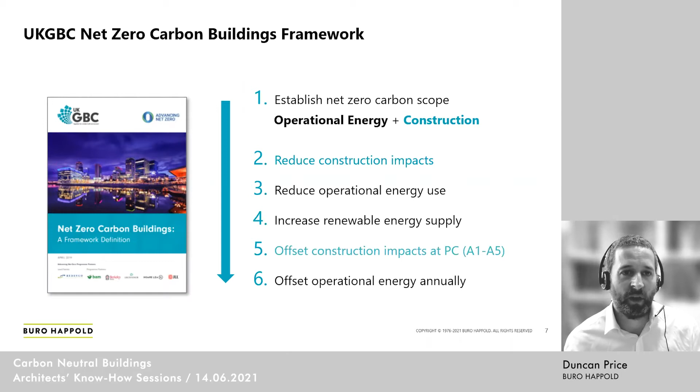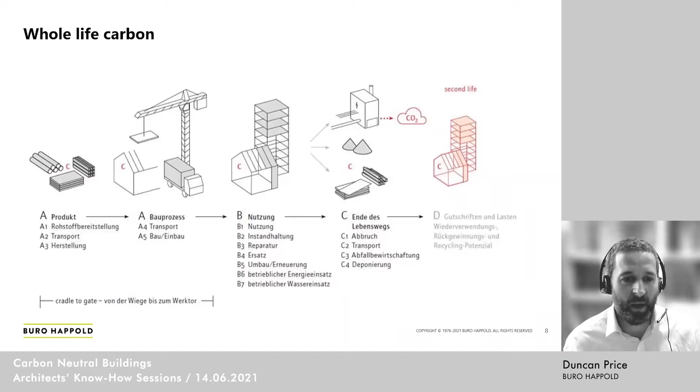One of the key things to understand as well is this term whole life carbon. So it's not just thinking about design, it's thinking about the product production, it's about the building process, it's also about the operation, and also about the end of use of the building. Going back to Emanuela's question about circularity, it's also about how do you take apart a building? How can you reuse the components? How can we ensure that most building products have a second life? Almost thinking of buildings as material banks, with a set of components that you can take apart and reuse again in another place or another building.

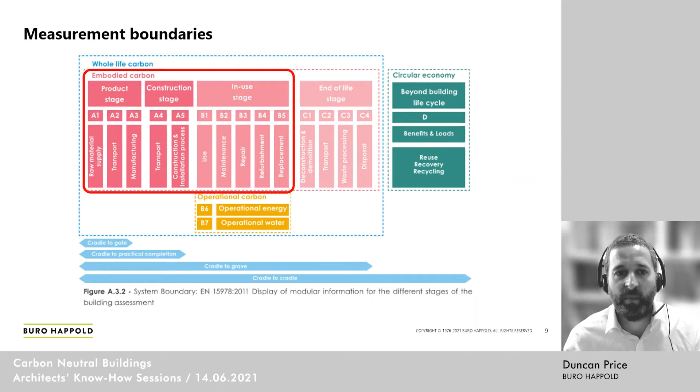This diagram tries to show the fact that this is a very fast moving agenda, and I'm sure you all recognize that even in your own countries, there's a proliferation of lots of different standards out there. Taking a UK example, we have city policies from the Greater London Authority, which is probably the most advanced city in this space in the UK, but many other cities are now moving fast as well. We have reporting through environmental impact assessments. There are targets from UK Green Building Council, the London Energy Transformation Initiative, LETI, the professional institutions like the Royal Institute of British Architects, and also the certification schemes like BREEAM and LEED.

And they all measure slightly different things. So that's not helpful, we understand that, but it's very important that you're very clear about what it is you're looking at, what's most important for your project. And we're slowly but surely getting alignment now. So clients are asking for the same thing in the same format, and the industry's learning together.

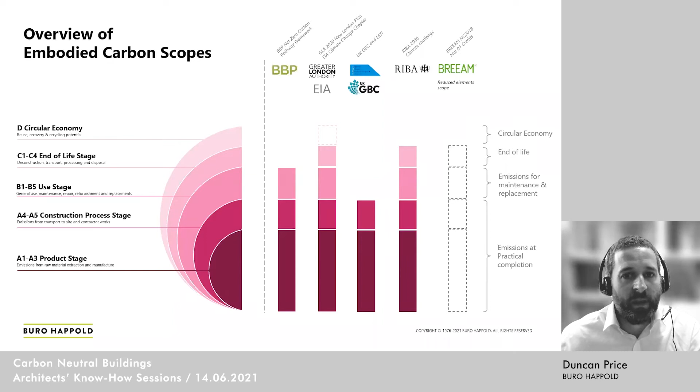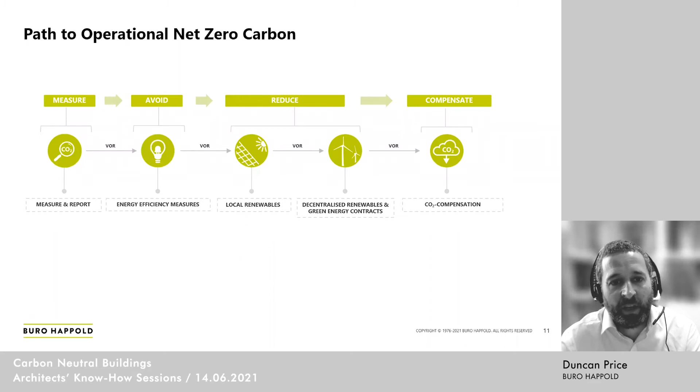So for operation, we can conceive how we get to net zero. It's about measuring, it's about having high levels of energy efficiency, local renewable energy, and enabling your building to be powered by clean green energy, often clean electricity, but could be hydrogen systems or low carbon heat, zero carbon heat from heat networks. And then having very clear carbon accounting and carbon offsetting for residual carbon. As I say, for embodied carbon, it's a little bit harder. So Thomas is going to talk through a little bit around the targets now, and I'll hand over to Thomas, and then I'll drop in again at the end.

Yeah, perfect. Thanks so much.

So there are many frameworks out there, and also all the architecture boards around do understand that they need to act on it. So there is one from RIBA that we find quite helpful in our international projects, the challenge on domestic and non-domestic buildings and how over time those can be brought into play. So also one of the questions that came in was really how do we get there, what are benchmarks?

So that helps us quite a lot on looking at benchmarks where we want to go, and also seeing that it increases in a 5-year period. Next one, please. On that one, it's kind of important. I tried to see the question, how can you realistically offset it? So offsetting is one of the topics that was on Duncan's slide, and maybe we take it for later on.

So one big question is where the embodied carbon is, and there you can see that much is in construction already, 35, sometimes it says 40%. And then we do have it in maintenance and refurbishment. So there is really something in there for everyone to act on, with operations, regulated and unregulated as well. So that leads to the next part, where can we act on it.

So from the construction part, what we're mainly talking about right now, it's mostly in superstructure, facades, MEP, substructure, fit out, but also the transport and construction. In reality, you need to tackle all of them. It's not really helping to only tackle one, because the impact won't be significant. So you probably have to go on all sides, and we're going to show you a few projects where we did that.

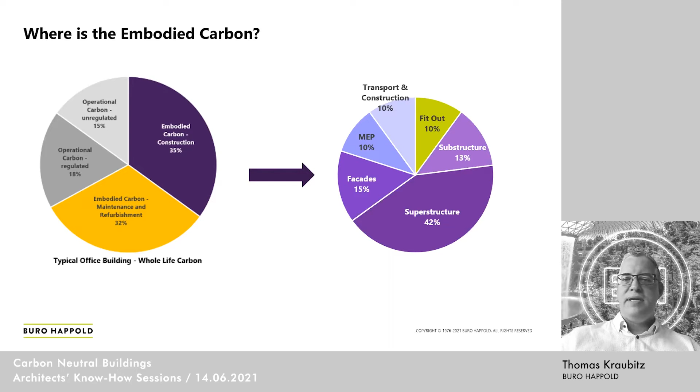Next one. So that also means looking at it over the whole period of the design life, but also from the beginning. So first of all, the question you always need to ask is whether a building can be reused, whether you can bring in changes that make it possible to keep it for the next generations, or whether it has to be new build. So that's a question we bring in quite often to our projects.

The second one is that you need to challenge the brief, especially as an architect. You need to ask really, why do you want to achieve certain topics, and is it already ambitious enough? And that's one of the biggest questions we get on projects. Are our ambitions right? Could we do more, or should we do more? And the third one is really bringing in low embodied carbon in your materials. Often enough, and we're going to see that as an example, it's a mix of materials, so it's not only one material on 100% of the building, but a mix.

That's normally when we come in, and it's very important as an architect to bring in efficiency in design, to design what's really needed, and to see which aspects are to be considered most. And then last but not least, design for deconstruction. That's a tough one, especially for the architecture, to say, well, we build it in a way that in 1, 2, or 10 generations it has to be taken apart, and how do we best do that?

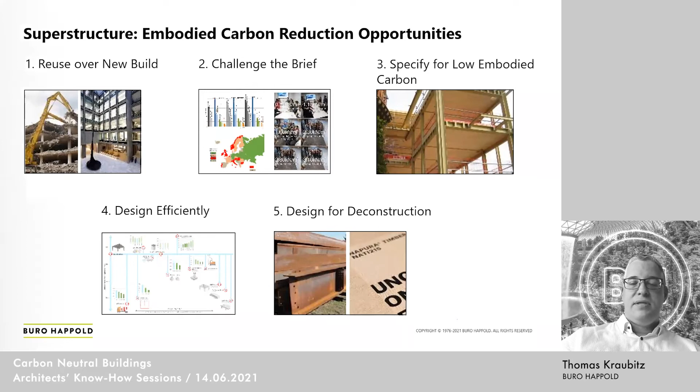Next one. And so those are the questions that are coming up then. What does good look like? What is a benchmark project? And how would you actually define it? And one best in class is currently on site, and just last week we had the roof getting on top of the building. It's a hybrid building, so we have timber structure in there, we have concrete in there, we have a lot of smartness in it.

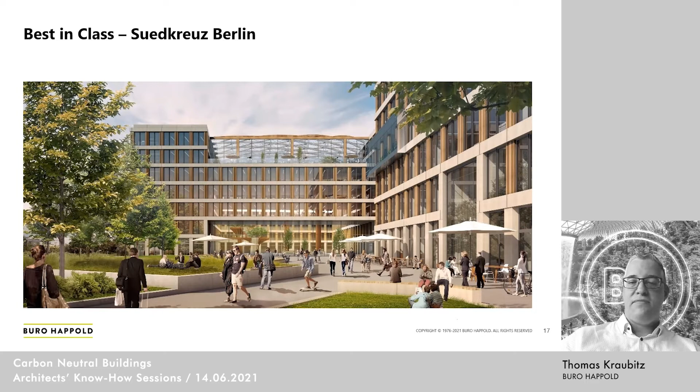It's also aiming for certification. It goes for DGNB Platinum, it goes for WELL Gold, and quite a lot of effort. It's a very interesting site. It's a pre-used site, and it does have a lot of components. If we go to the next one, from the rendering, really bringing it alive, one of the key parts is open space, bringing light in there, and we have those trees in there that serve as meeting facilities.

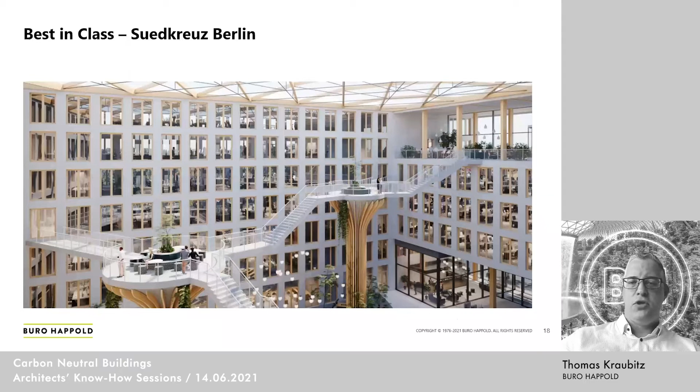And you can see already here that we have a mix of materials. So it's a hybrid. Obviously there's quite some concrete in there, especially below ground structures. But also here you can see that the trees and the bridges require certain materials, but it's mostly concrete. And then we have a lot of timber, as you can see from the frames, but also from the roof structure with ETFE. So there is really a mixture of materials, using the right material for the right purpose.

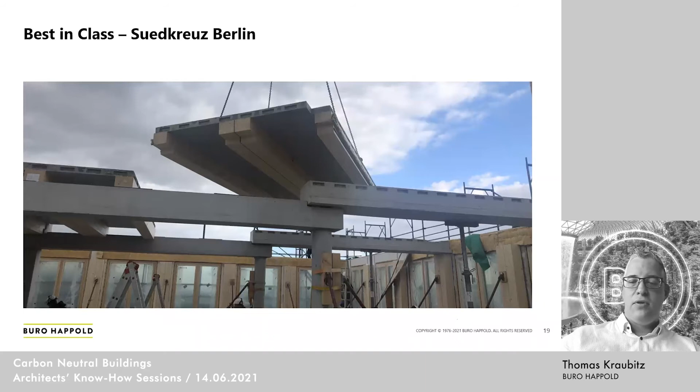And here we see it in construction already, bringing in modular elements, prefab and precast. That's one of the key parts in how those things can become successful. And the next one already shows you a bit of the underside of an office floor. So very interesting to bring that in. There's a full BIM model behind it, and that has been carried from the early design to construction.

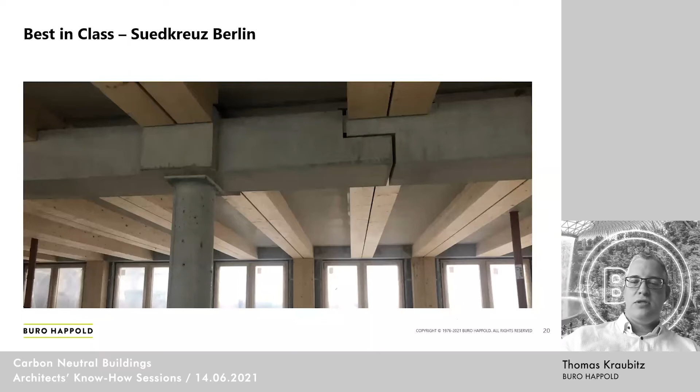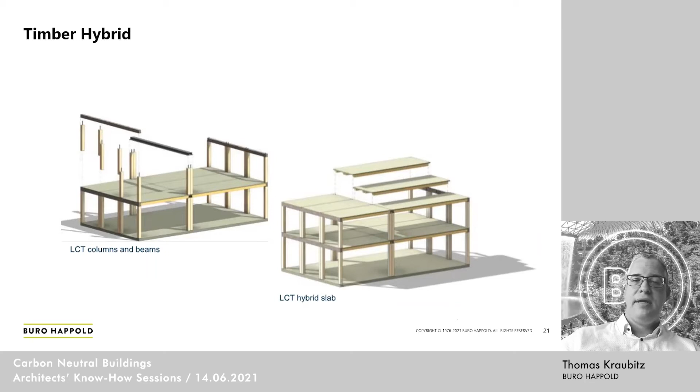Here it's also just everything that was taking place on site has been tested before. Everything has been planned in a modular way, and so that makes the whole construction process quite fast and very good to calculate the effect.

I'm going to show another example now, which is another project which is on site at the moment, which is the Stratford Waterfront development in London on the Olympic Park. And this image is from probably the biggest building on the site, which is the London College of Fashion, which is relocating from about 3 or 4 different buildings across London, all onto one site for the first time.

So it's part of the University of the Arts London, and it's part of a culture and education district alongside the Victoria and Albert Museum, V&A East, plus the BBC Music Studios, Sadler's Wells Theatre, and also some residential schemes as well. And I just want to show this example because it's a very high quality design.

So Allies and Morrison, the designers for this LCF building, there's no compromise on quality, and yet it's been designed very carefully with both passive design and active design to be very low energy demand, low embodied carbon, connected into low carbon energy networks, but also climate resilient. So making sure that the building is robust in terms of the environmental conditions for the future.

So we've been testing the climate out to 2050 and beyond to think, well, how is this building going to work in a much warmer climate? So it's a mixed mode building with a mixture of natural ventilation and mechanical ventilation, high thermal capacity through concrete, but also making sure that we're reducing the embodied carbon of that concrete where we are using it.

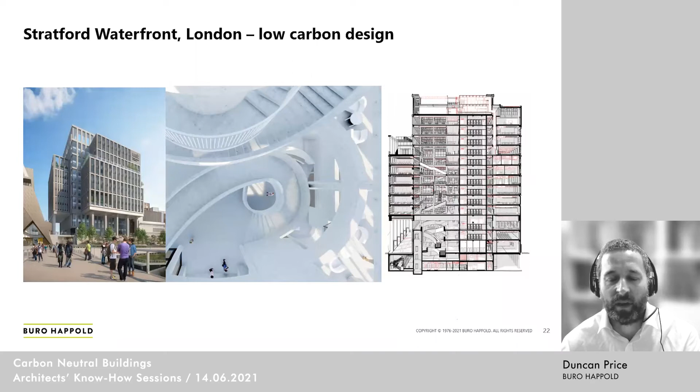Solar PV generation connected into a site-wide heat and power network run by an energy services company. 25% of the heat comes from wood chip biomass, the rest currently from gas-fired combined heat and power, but with a plan to decarbonize the heat network in the future to be hopefully zero carbon.

Again, part of our workflow has been very important, working with the architects. I think this building on the image actually is for V&A East, which is the building next door, but we did this for all the buildings on the site.

This one was with ODT architects, but essentially having to take the three Revit models, the architect's model, the structural engineer's model, and the MEP engineer's model, using coding and scripting to connect those together, using One Click LCA in this example as the embodied carbon database, and then running lots of analysis, lots of optioneering to understand what the embodied carbon could be.

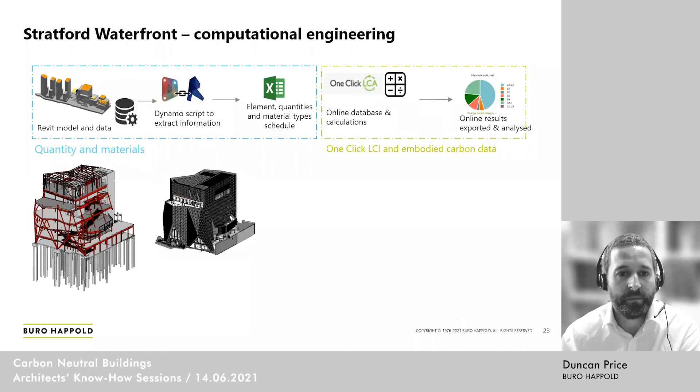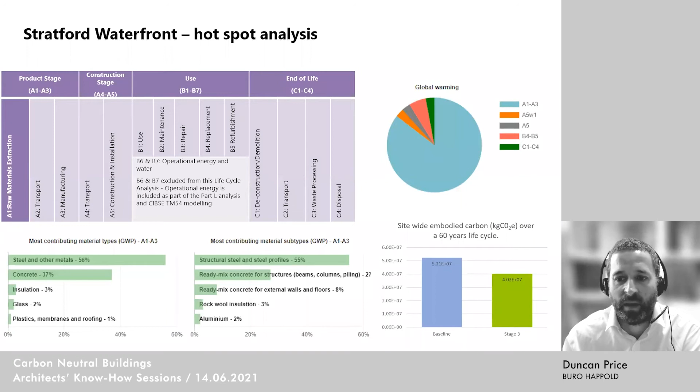And on the operational energy side of things, we've also been thinking very carefully about operational energy. So this is a very complicated graph for those that don't normally look at this, but we're looking at what the existing buildings are doing at the moment, because this is quite a unique building, because you've got a mixture of teaching spaces, workshops, laboratories. It's a really quite interesting mix of activities in a space. So it doesn't easily lend itself to, for example, an office energy consumption benchmark.

But here we compared it against some existing buildings, which are quite simple but older, like the old London College of Fashion. We compared it to Central St Martins up at Granary Square in King's Cross, but also the new London College of Communication building. And so through that, we're able to work out how low we could go, which turned out to be quite low.

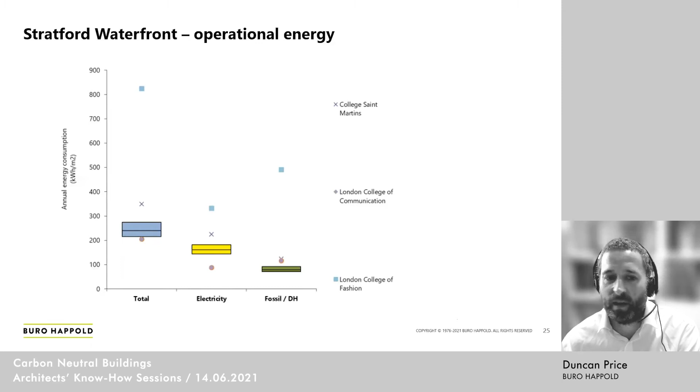So the net result of that is a building which is on site at the moment, which we're expecting to meet and beat the RIBA embodied carbon target of 600. It's actually very close to another target from LETI, which is 500. So we're really pleased that if through the construction process we manage to achieve that, that's going to be a real exemplar of how possible it is to get actually close to a 50% reduction compared with standard benchmarks, which may be up to 1,000 kilograms of CO2 per square meter.

The total energy consumption, I say it's a bit higher than an office, which would be aiming for about 160 nowadays, but it's a lot lower than most labs, and much, much lower than existing buildings. So this is an example which has now been included in the New London Architecture Zero Carbon London case study examples.

So both of those examples show what's possible to do to drive down energy consumption, to reduce the embodied carbon of construction. As I say, this is also connected into a site-wide heat and power system, which has a roadmap to zero carbon as well. And so through the combination of those two, we expect it to have a pathway to net zero carbon by 2030, if not before. But I want to leave you with an example that's already got there.

So this is another Buro Happold project from California, the city of Santa Monica, for the municipality, and this scheme is net zero energy, net zero water on site, and is actually now certified LBC ready under the Living Building Challenge as well. So it's a broader sustainable building. There are lots of great videos of this online if you want to go and have a look at it, fly through and understand all about it.